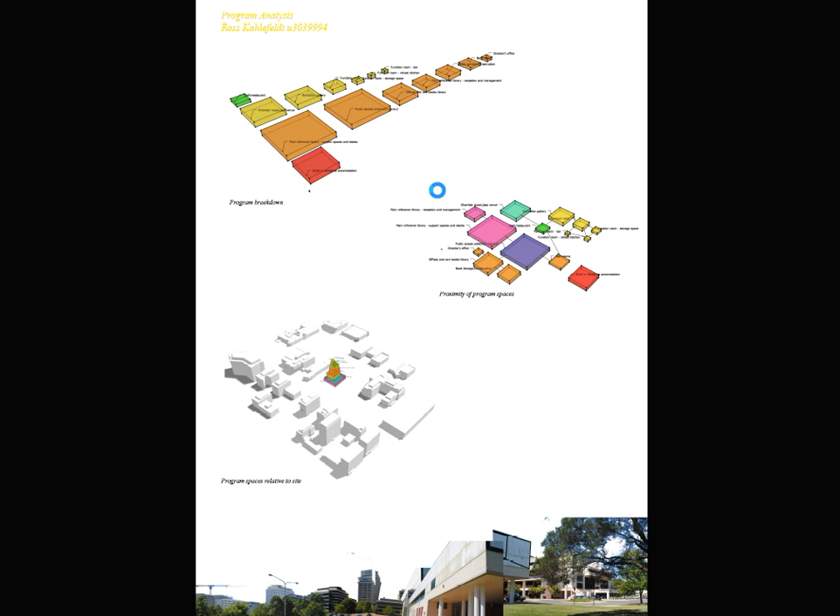It's not wanting to. Yes, that's not helpful, is it? Close. Oopsies. Okay, here we go. So Control L. Okay, so with a return brief, sorry everyone, it's spazzing out. Okay, here we go. Maybe it's a big file.

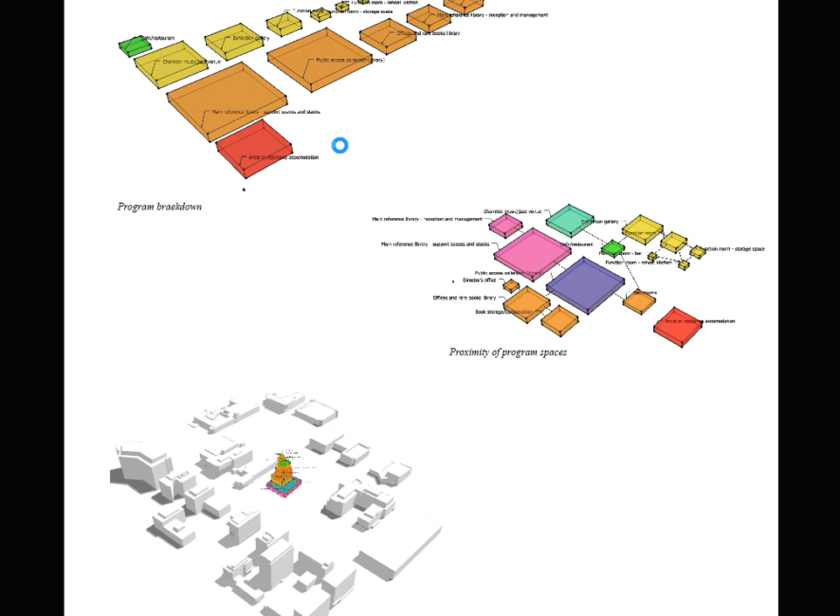Okay, so what you can see here is last year's Design Studio, where we were doing a library and theater complex in 3.1. So what this student has done is take all the main areas and turned them into boxes. Essentially, they've taken the area of each space and turned it into a square by doing the square root of the area, which gives them two equal sides. Then you can see they've used three different colors for the three different programs in the library, and they've also given them heights.

Okay, so there's many ways to do this - this is only one way. You could choose to make a model, or do it something like this, in perspective, though it's fine for it to just be axonometric and so on. Now this diagram up here actually gives you an idea of how big everything is.

And then the next thing they've done here is a proximity diagram. So what they've done is link all the spaces that need to be near each other with a line, so they can see how everything relates to each other.

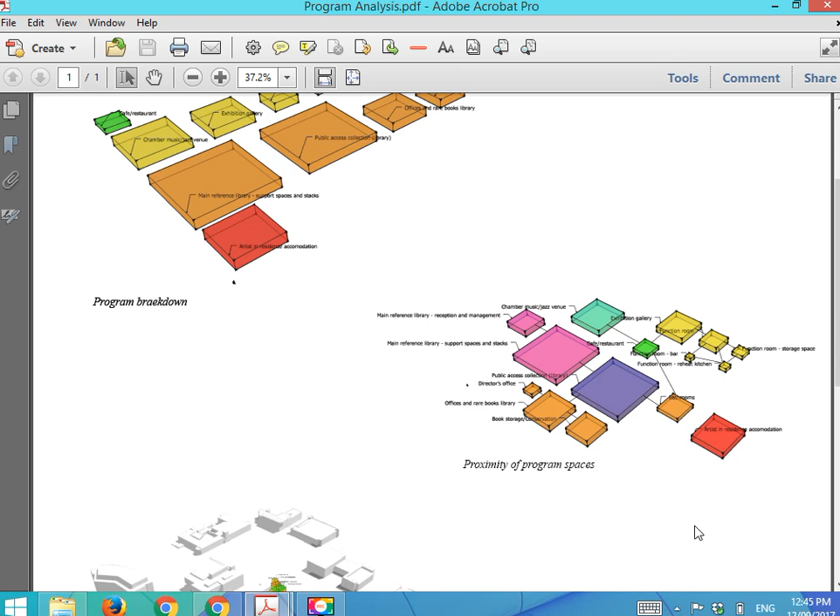Okay, so to go through it again - this diagram here, Kerry? What they've done is take each of the spaces and areas and turned each area into a square. So let's say the lounge area is 25 square meters. How you turn that into a square is you do the square root of 25 meters, which gives you 5. So it's a square that is 5 on one side and 5 on the other side - if you multiply them together, 5 by 5 gives you the area you started off with.

All right, so it's something that is drawn to scale as a 2D and a 3D thing, so you know how big it is in terms of its footprint and also how tall it needs to be. So you know that the ambulance bays need to be taller than the inside spaces. This is why this kind of program breakdown is important. Okay, so are we clear on what's required for the return brief?

Yes, so the spaces - do we create our own layout of how? Okay, so the question is, do you create a layout? I would say no for now. I would actually group them into bigger spaces, and then deal with the actual specifics of those spaces later.

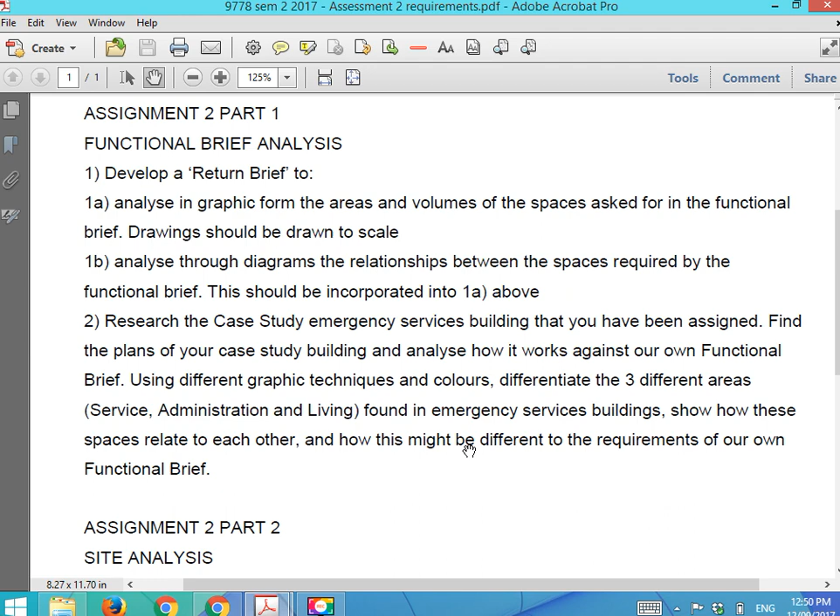And what we're doing here is a functional brief for the project that we are going to be doing. So if we go back to this, that's the return brief, which is 1A and 1B. The case study for the emergency services building I've already spoken about. And the other thing I'd like to talk about today is the site analysis.

Okay, so what you will see on Moodle is - let me get to my Moodle. Where is my Moodle? Okay, so under site information, which is in week 5, you see there that I have put in these six documents.

So what I want to do is go through them to show you what we're doing in this class. Our site is going to be on the Federal Highway at the corner of Old Well Station Road. Okay, so let me show you what I've given you here.

This is a drawing that I've done to show you where the site is. We've got the Federal Highway here, we've got Old Well Station Road here. This is the new Canberra Park Resort, and this is where Epic is. I'll show you the aerial photographs and how to get there shortly.

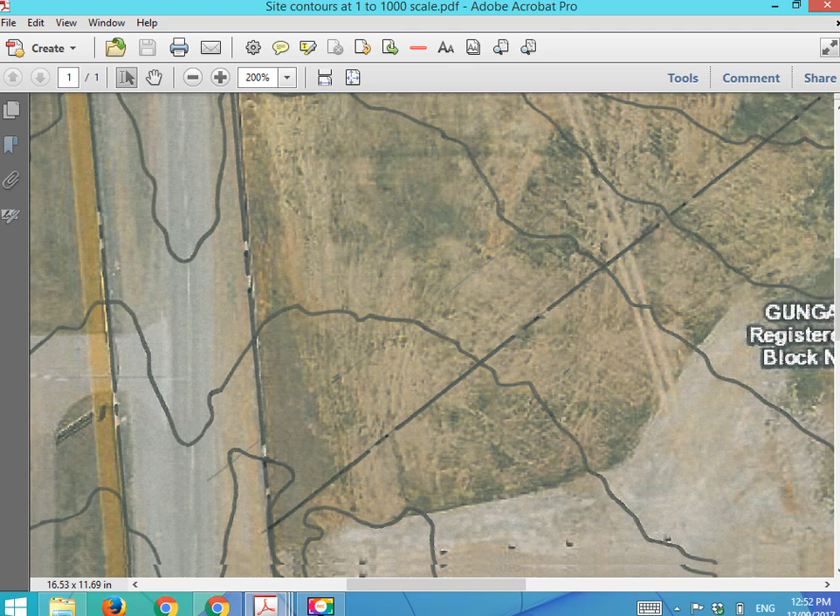So you can see on here, this is the corner here. I've actually gone and hand drawn all of these contours in there, and so you guys might well have to change this into a digital format to be able to use it, or trace it over by hand, depending on how you actually want to use it.

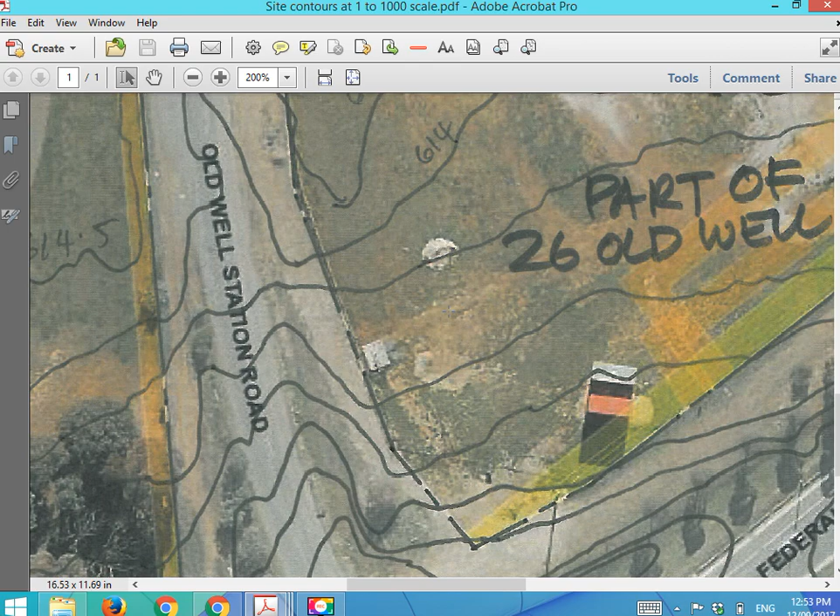But it actually gives you an idea as to the heights between the road, the Federal Highway, which is down here - you can't see that, can you - the Federal Highway and the site. So basically, from the Federal Highway up to the site, you've got about 1.5 meters. This will be interesting for us in terms of how we then get our ambulances in and out of the Federal Highway.

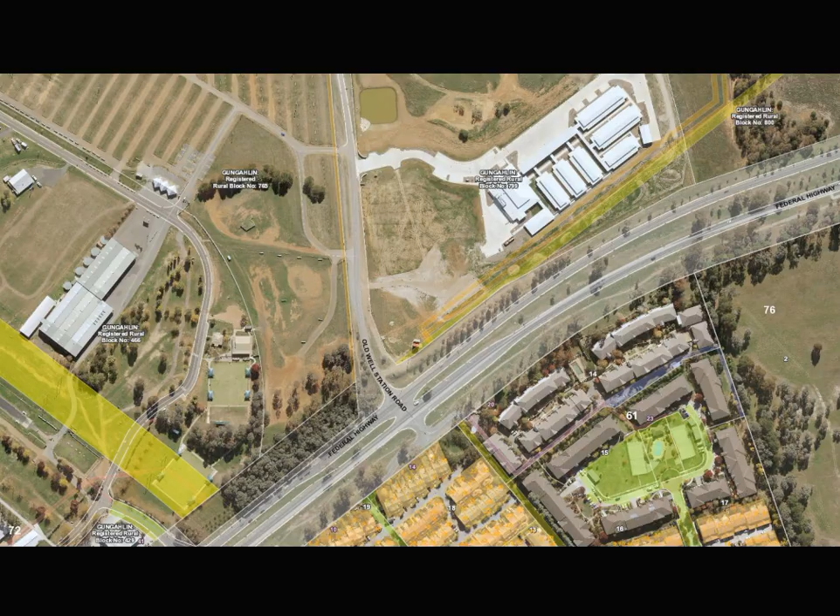Going back to here as well, what I've also got is a series of aerial photographs at different scales, and you can see the scale in the title of the aerial photograph. So this is the thing that I drew the contours on at 1 to 1000. The next one is 1 to 2000, so you can start to see this whole hotel thing, Epic here, and the houses up in Hackett or Downer or whatever it is. And then further out, we've got 1 to 5,000, so you get a better idea.

You can see the Epic markets here, and the two horse tracks over here, and the suburbs of Canberra down here. This is the Federal Highway that goes up to Sydney, and this is the road that goes up to Gungahlin through Mitchell. Then finally an even bigger one at 1 to 10,000 scale, which shows the youth detention centre, the Mitchell industrial area, the racetrack, and Hackett Downer and so on and so forth.

I'd draw your attention to the address of the site, which is actually part of 26 Old Well Station Road. Now, all of these aerial photographs I've got from the ACT mapping service.

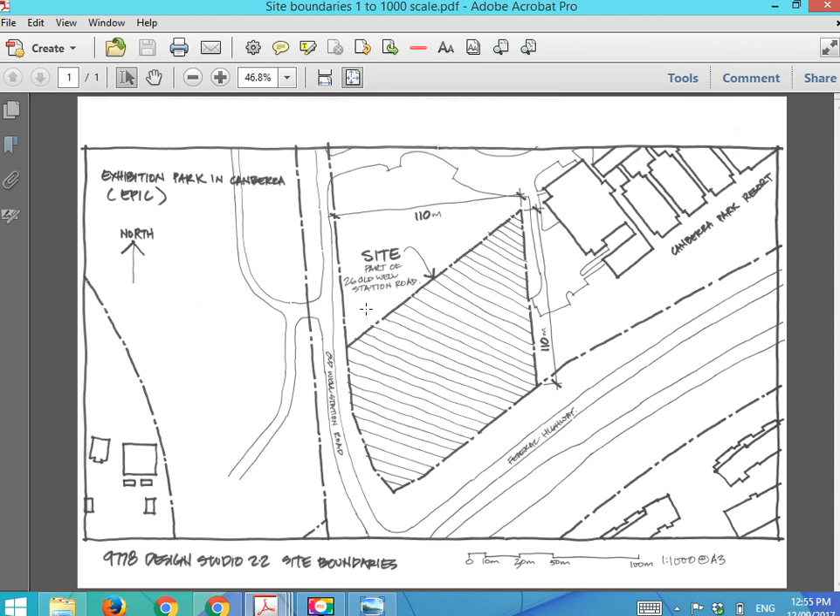I'll now show you how to get there. What you do is go to actmapi.act.gov.au. Just for your information, if your case studies are in Canberra, this is the most up-to-date aerial photographs you will get on Canberra, much more up-to-date than Google Maps or Google Earth. So if you have a case study in Canberra, this is the one to go to.

What you need to do is click on the top left, the basic aerial mapping service, and once it loads up it will give you a choice as to what you need. I'm sorry everyone, it's going to take a little while to load up.

Any questions so far? With this, all the different layers that you need to do your site analysis for are going to be there. Okay, let me just pull that out.

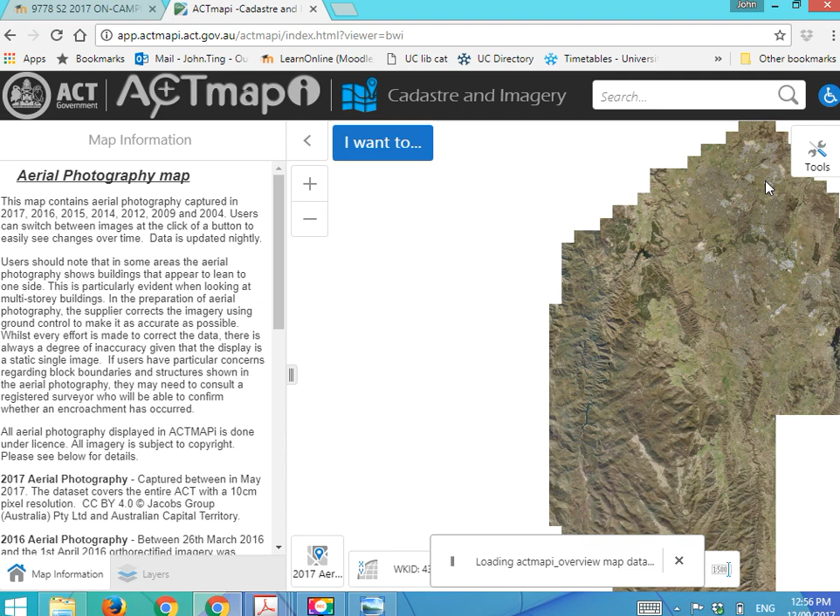So what I basically asked for is the topographical features of the site and the surrounds. Topographical means the shape of the land, and things like lakes and rivers and what have you. And of course you now have the contour map to work out the fall of the site and surrounds, which you'll be able to get from these maps.

The existing vehicular and pedestrian circulation, which you can see on the aerials, like here. And then the climatic conditions of the site and surrounds. North is presumed to be up with all these maps, so you can tell me where the sun comes from. You can research where the rain comes from in Canberra, where the wind comes from in summer, where the wind comes from in winter, and so on. All of those things need to be dealt with as well.

Number 5 is I want the existing buildings on the site and surrounds, their heights, forms, uses and so forth, and you get a plan here as to what everything is. But don't forget you'll also have to go out onto the site and take photographs of all of these things, which I'll show you how that works in just a minute.

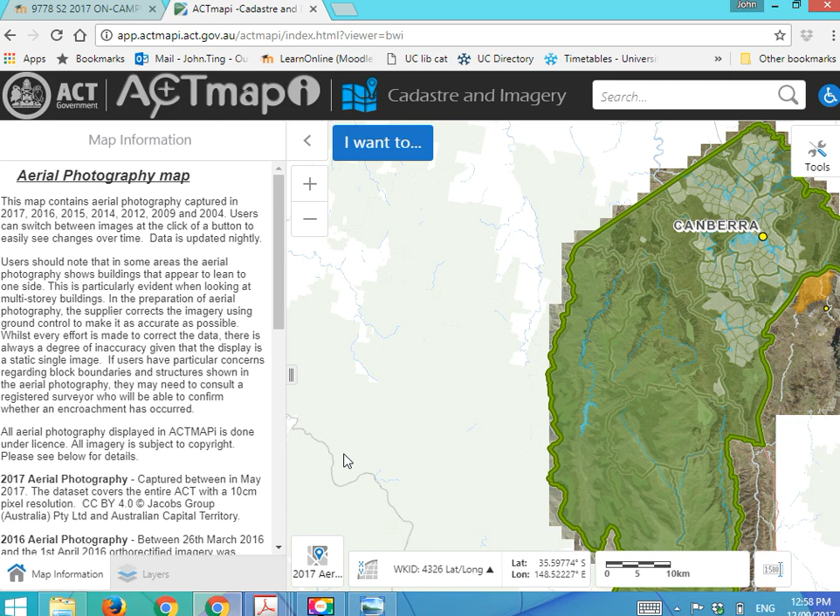So what you do here is go, I want to search blocks. And then search block by street address, and the street address is 26 Old Well Station Road.

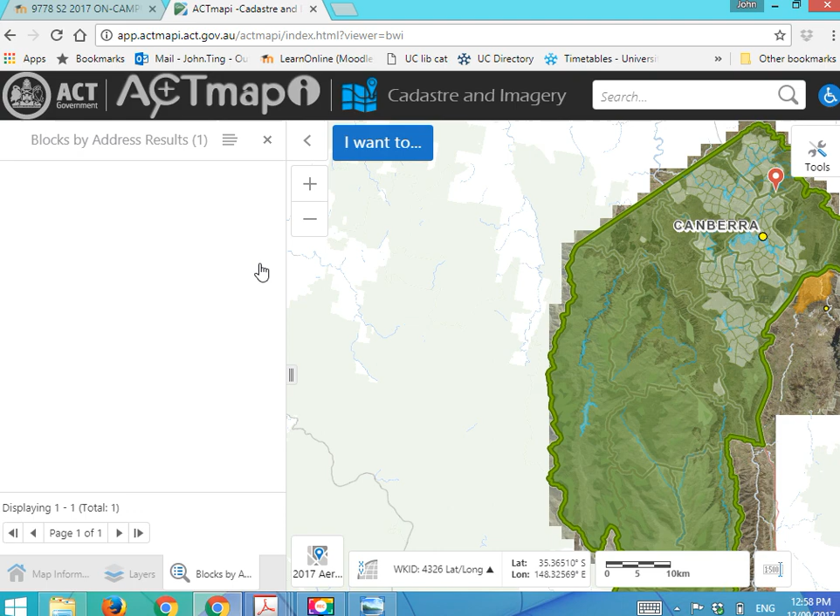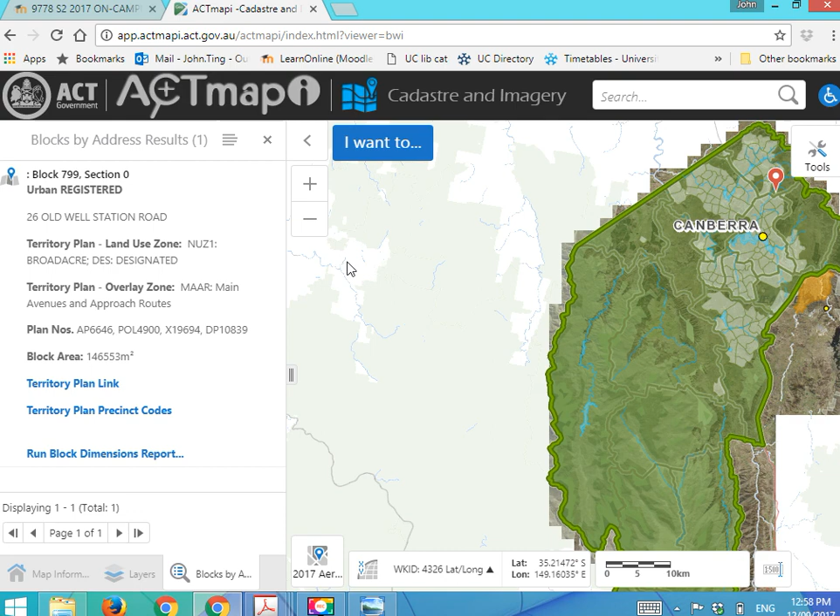Of course you don't need to put in what suburb it's in, because it seems that in Canberra none of the roads share names. Every road has its own name, so there are no two roads with the same name. So now you can see where it is. I think if you click into it, it will zoom into that. Okay, so that's actually what we've got there. So that actually gives us our site there.

So you can see from here there's a whole stack of things. You can see our site is actually this yellow bit, and what I'm doing is cutting off a corner there for use for this design studio.

Then you have all sorts of details about the land and so on, which go up and down there. This is really more about a town planning designation. Don't worry about the zoning—I'm giving you all permission to put an ambulance station there.

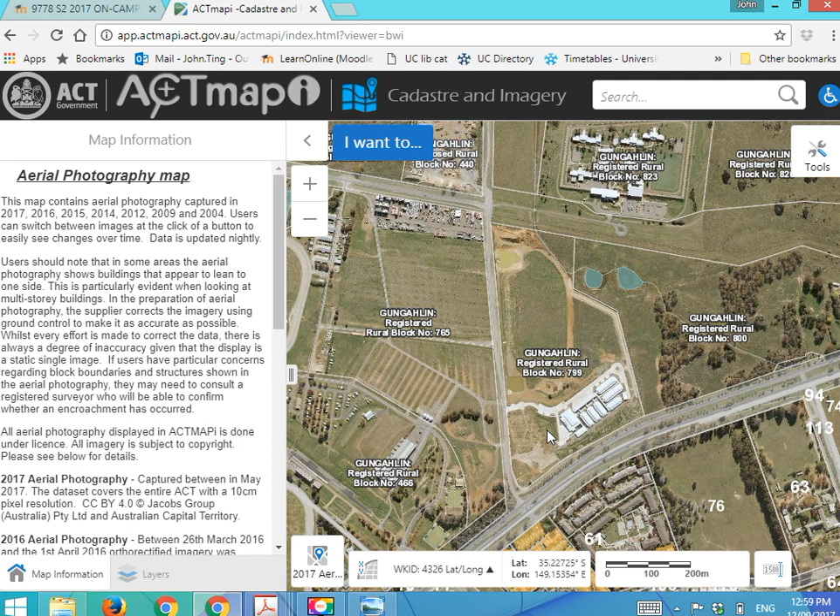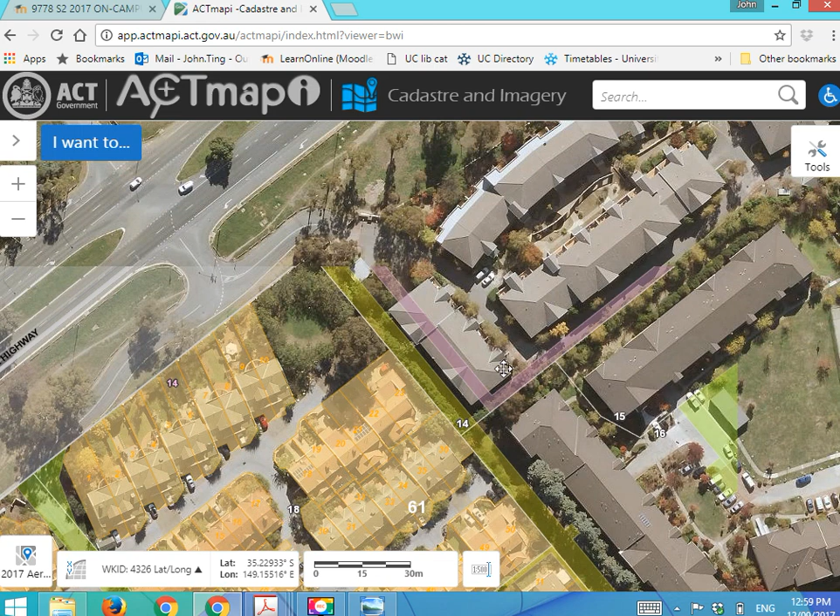So if we go down here, you can actually see that we can zoom right into it, and you can see basically what all the buildings are and all the property boundaries and what have you, which is very handy to tell you what you need to look at.

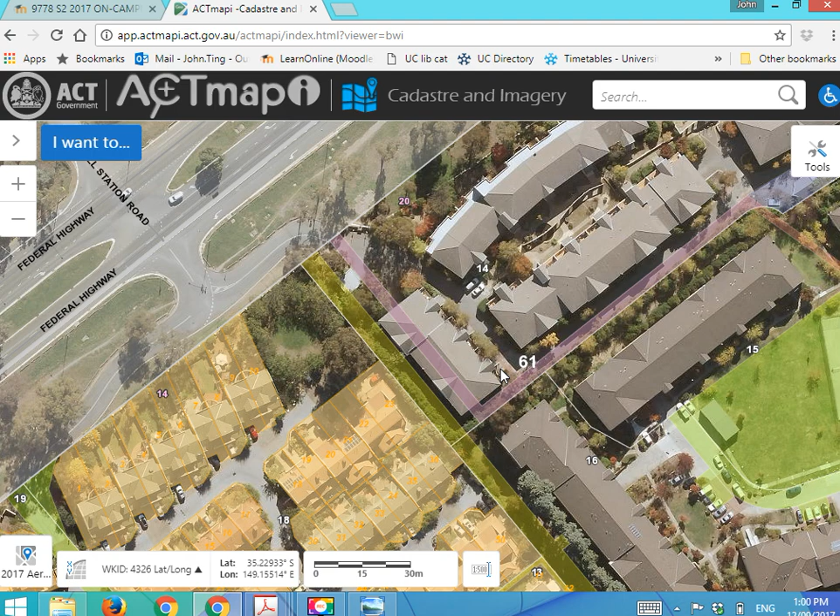But for the heights of the buildings and what have you, you need to go out there and have a look at it. In the site analysis I've asked for existing buildings on the site and surrounds, heights and forms, etc. Now of course the next question is, how much do you do?

Do you do something like this much?

Or do you do something like this much? Okay, so there's no end to this.

So what I suggest is you do an area that covers the site and maybe a little bit more, so perhaps something to this area. So the site there we have in yellow, and the red might be the parts that cover all the bits and pieces that we need.

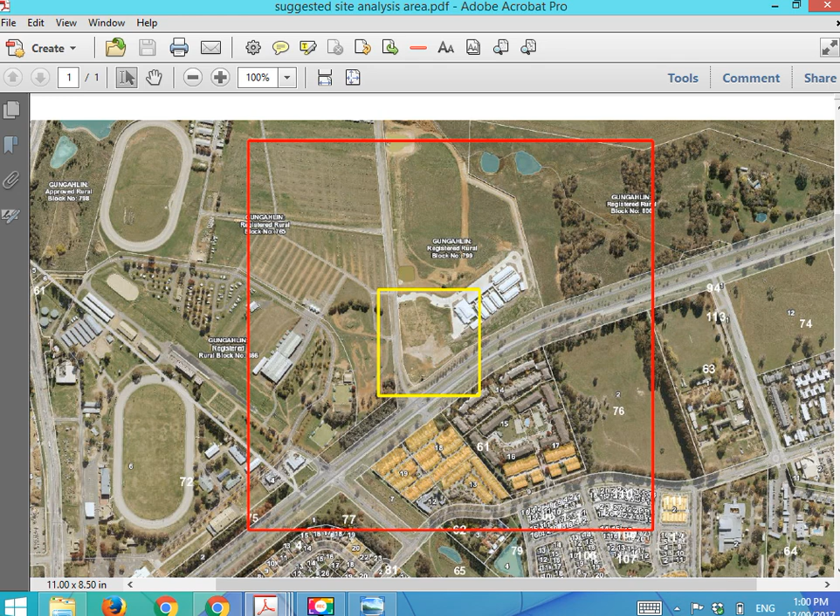All right, so what I'll now show you is some examples from last year in 3.1. Any questions so far? No questions? All right, so

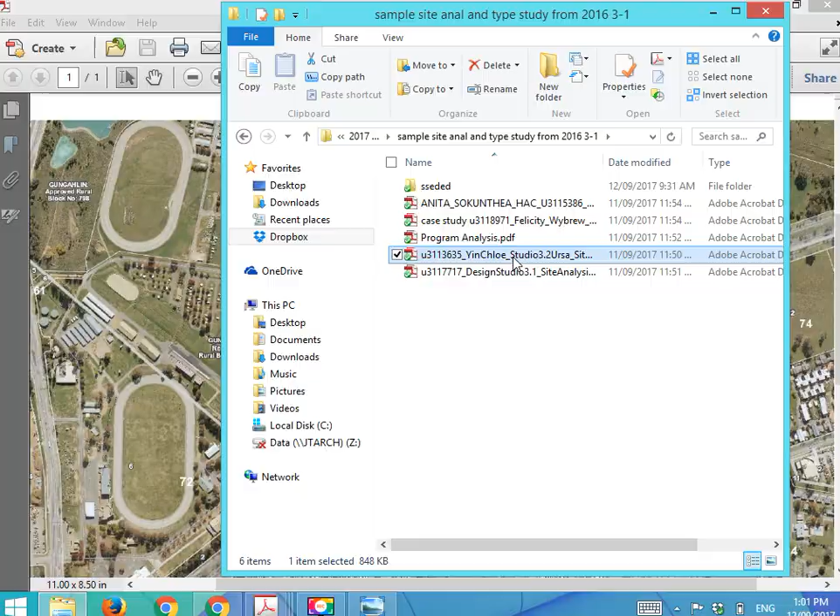Now, first thing you have to remember is 3.1 was a site in the city. So the site was much denser, it had a lot more buildings around it, and so on and so forth. And so it was a different kettle of fish. These drawings were all at A1.

So the drawings were scaled to suit A1. All right, but the kind of information you need to have on it is pretty much what you see here. Let me try the Control L again. Okay, so this is Chloe's A1 panel here.

So what she's done is each of these drawings actually analyze a different set of things, and they also come in different scales. So you'll need to decide what scale you want to do each of these 6 categories in, and maybe you might want to have an overall one as well.

And what you can also see with Chloe's thing is she's got lots of site photographs, so you can get an idea as to what she's looking at. So if I zoom in,

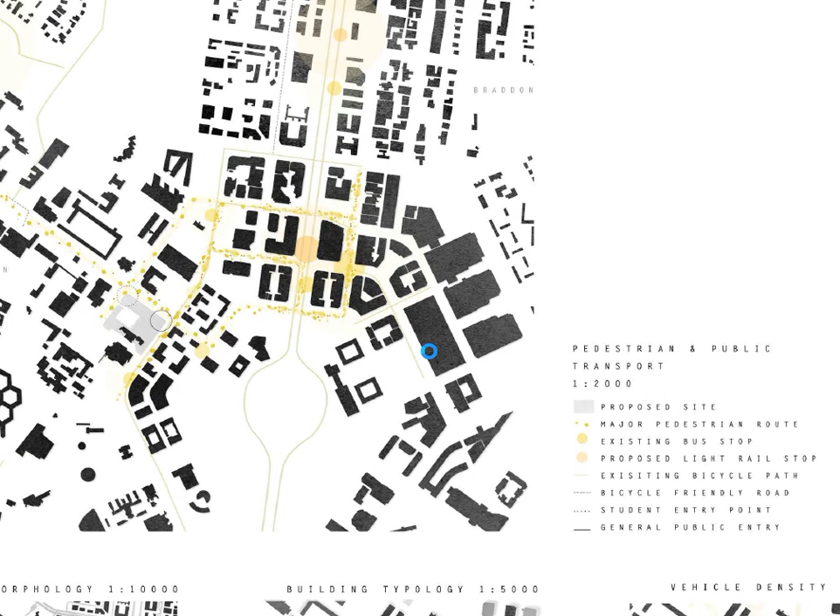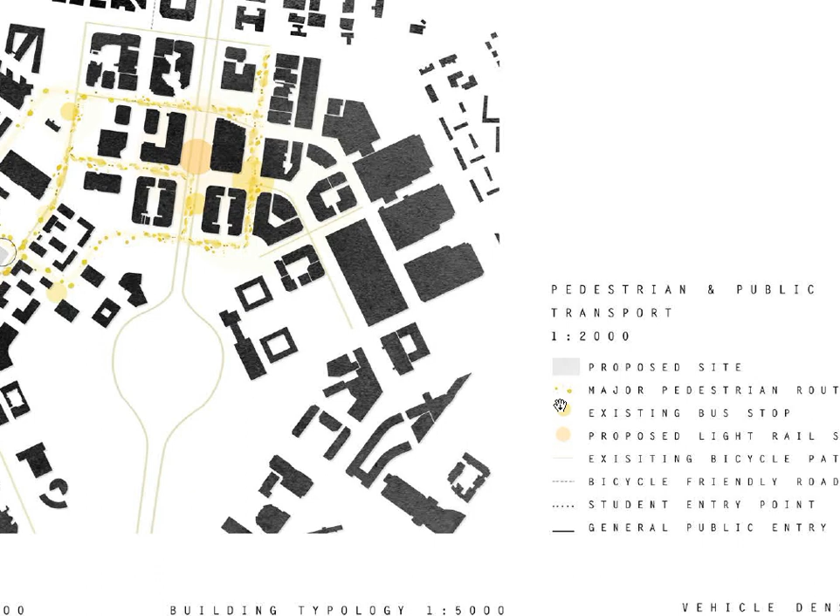the first thing that she's got here is basically her pedestrian and public transport map, right, at 1 to 2000, which has all these different keys here. So basically, where the bus stops are, where the proposed light rail is, these kind of things are the major pedestrian routes - these kind of bubbly things.

So basically, this was where the site was. You can tell because it's grey, a different color. But this is how people walk through the city to actually get to the site.

Okay, the other thing that she's got here is the vehicle density map. So not only is it about roads and where the cars go, but also which roads carry more cars than others. And she's

represented that through the darkness of the color. Okay, so right here the dark yellow is where there's more cars, and when it's more faded, that's when there's less cars. So this again is the site that we were dealing with last semester.

So stuff like that you can put in the existing vehicular and pedestrian circulation of the site and surrounds. So really this is similar to exercise 1C, where you're abstracting these kinds of things on the map to show us what we need to know.

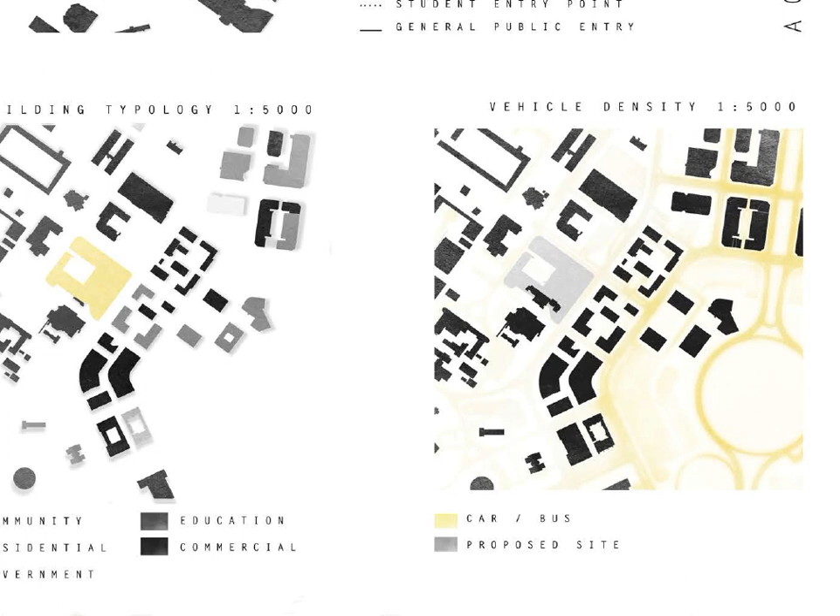What she's got here also is building typology study. So not only has she gone through and told us where the buildings are, but she's also gone through and told us what kinds of buildings they are: community, residential, government, education, so on and so forth.

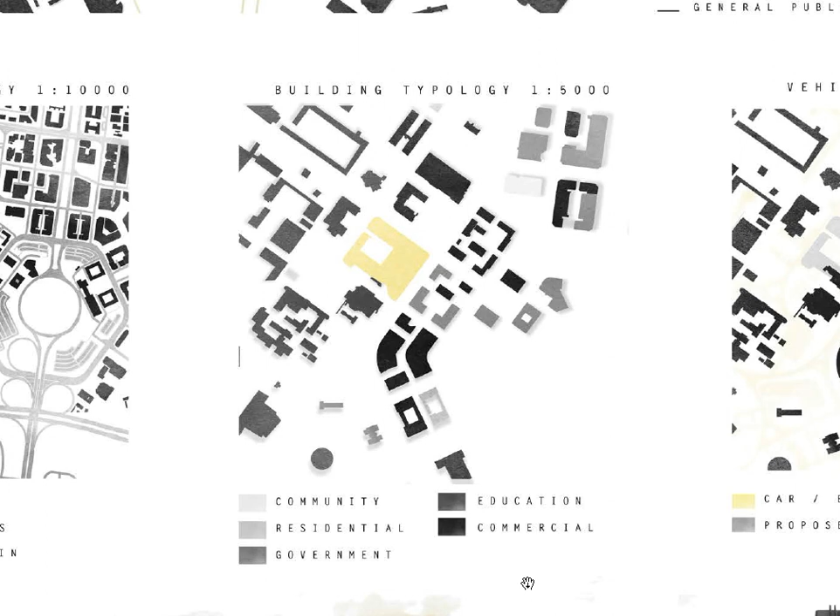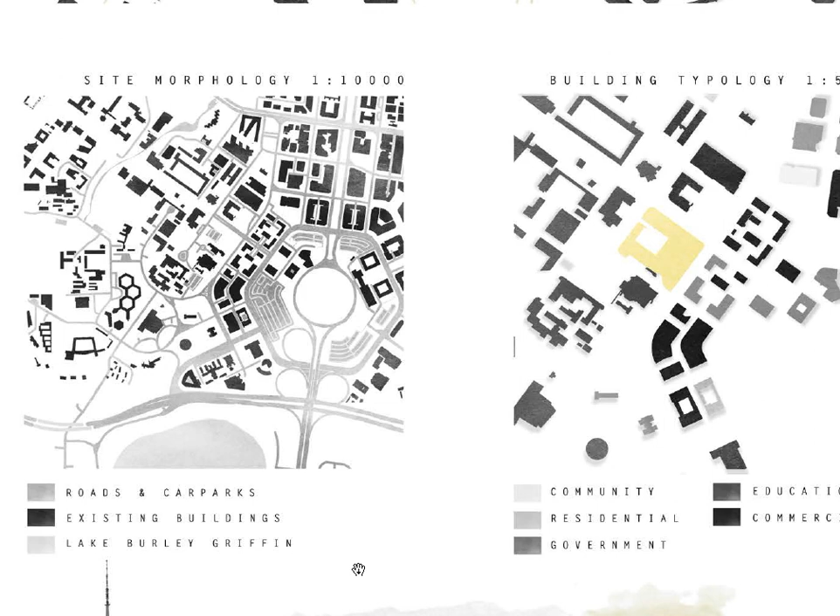Now yours is going to be simpler, right? Yours is not going to be as complex as this. Yours will be simpler. And then what she's also got is car parks and existing buildings - it's a more general thing.

Okay, so the photographs are really important because it points out the things that were important to her on the site. Now, for this site analysis exercise, we won't be going out to the site altogether.

I will leave you guys all to make your own way to the site and take pictures and make notes and just get a feel as to what you're looking at.

Now, because it's next to the federal highway, what I would suggest is firstly that you go to the site. There's car parking in that hotel, and it's just a grassy field next door that you can walk into. But I would also drive to the other side of the road

just so you can get a feel as to how the landscape is, how high it is off the road, is the federal highway going up or down past that, how does it look from the suburbs across, and what might be useful for you guys is to get 2 people in the car, and for the non-driver to be taking pictures of what the site looks like as you're driving past going towards Sydney, and also as you're driving past coming down from Sydney.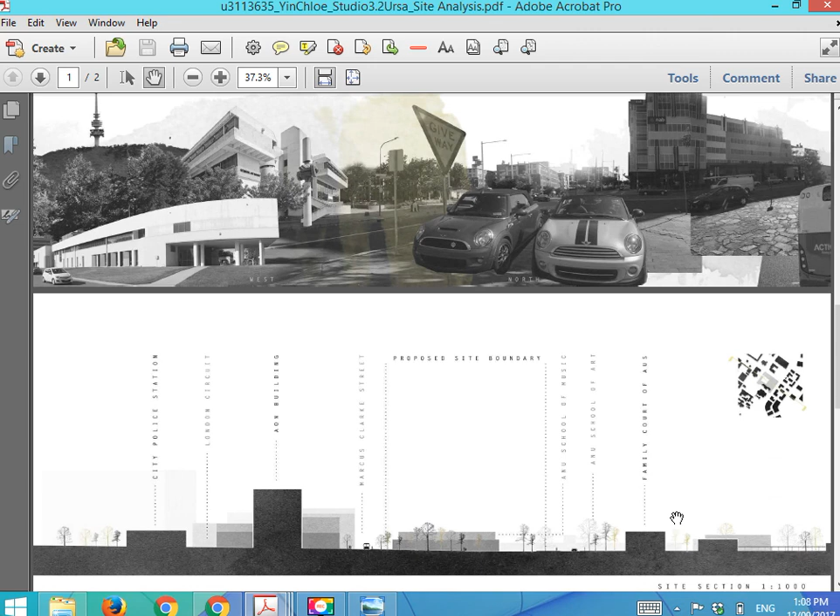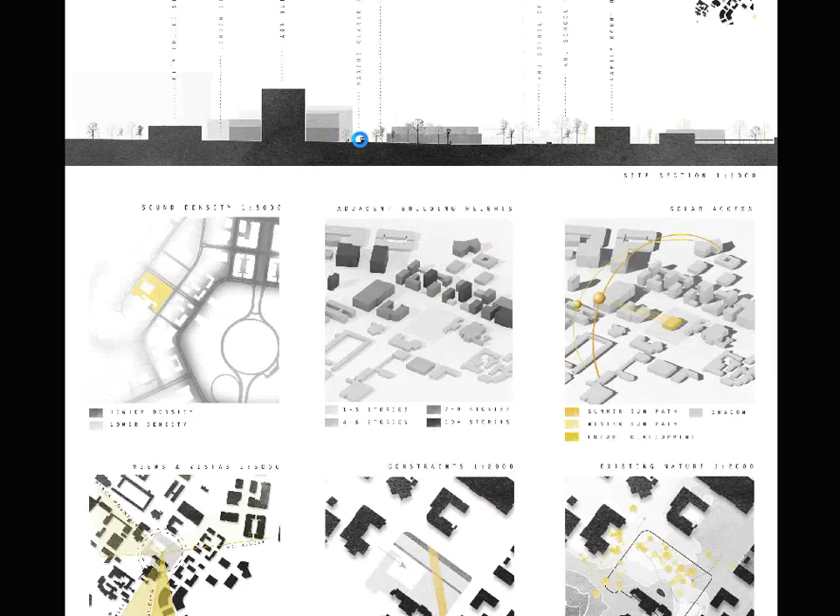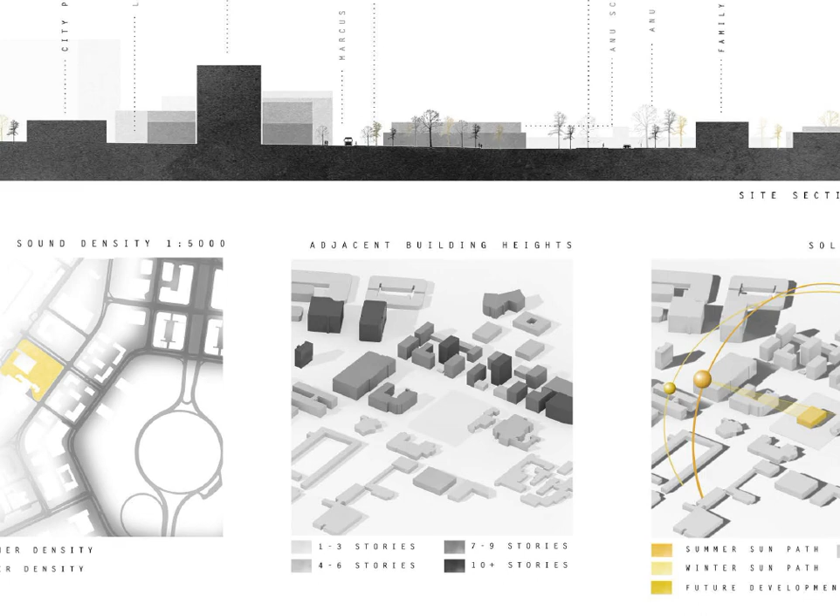Now, you see what Chloe has done here is she's also got sections through the site, so we get an idea of how the site actually goes, whether it's sloping up and down. In her case, last semester, it was quite a gentle slope. In our case, our site is fairly flat, but there's quite a difference in height between the corner of our site and Old Wells Station Road.

Now you see what she's also done here is a sound density, which I've not asked for, so let's not worry about that. But this is a nice little model she's done, where she's got the site coded in terms of volume as well as color, to show the different heights of the buildings.

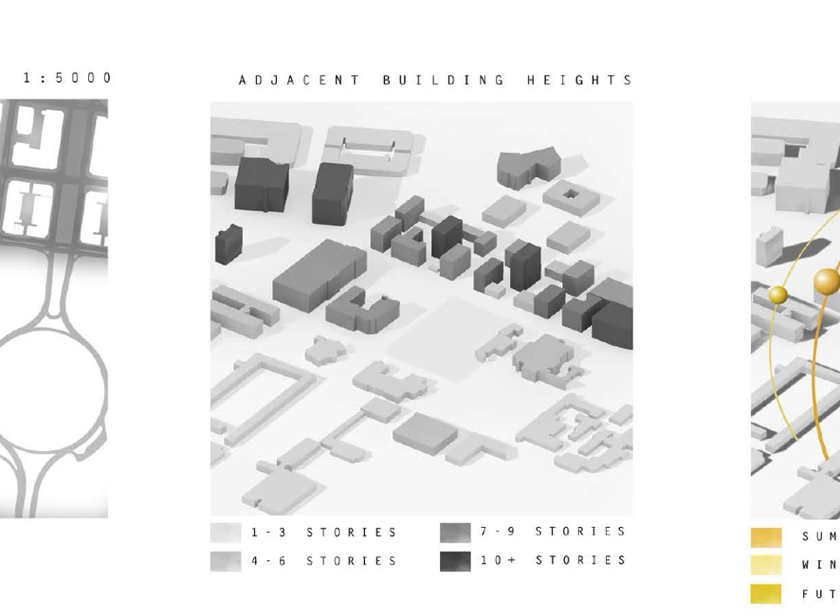This refers back to point 5 on the assignment sheet, where I've asked for existing buildings on the site and surrounds, their heights, use, forms, etc. Our site will be much simpler than this, because it's 2.2, not 3.2, but this is the kind of thing you can expect moving on to 3.1. So getting some practice developing these kinds of drawings is most important.

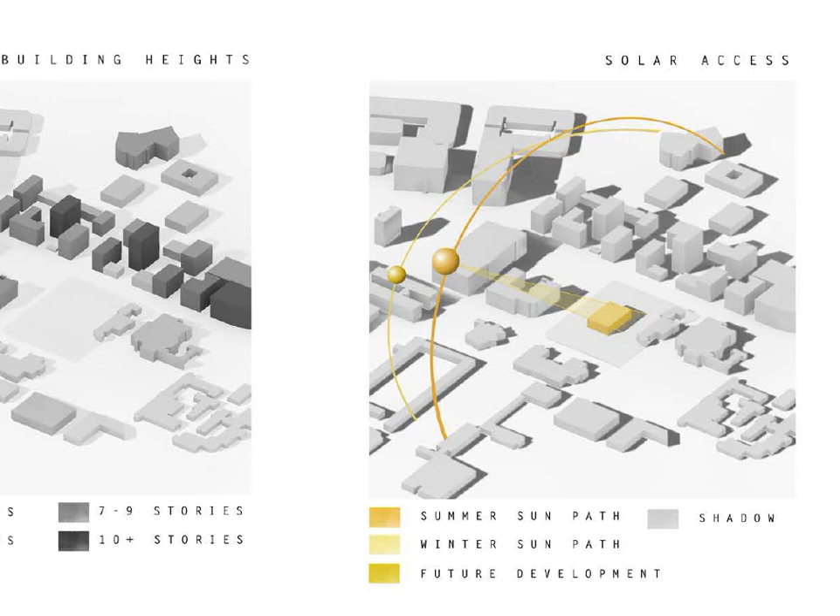There's many ways of doing solar access, but basically what we need is the site and the sun path in summer, the sun path in winter, and also what is in shadow. This gives us an idea of where we should put things that need sun and where we can put things that don't. Certain parts of the building, like the living areas, will probably need sun, so we need to know how these things are done on the site.

Existing nature, you can see very clearly this is the site we're dealing with, and here are all the trees that are on there. The existing vegetation, which is what I asked for in point number 2, the flora of the site and the surrounds.

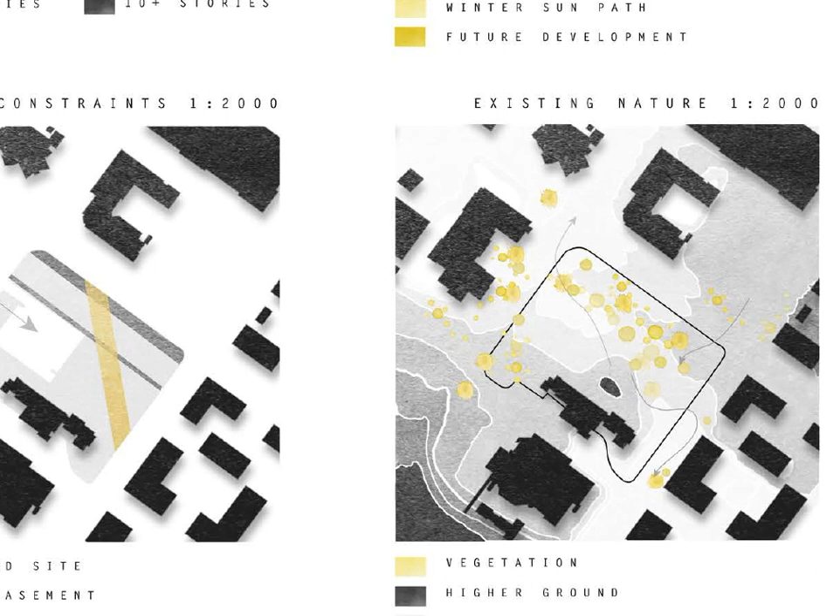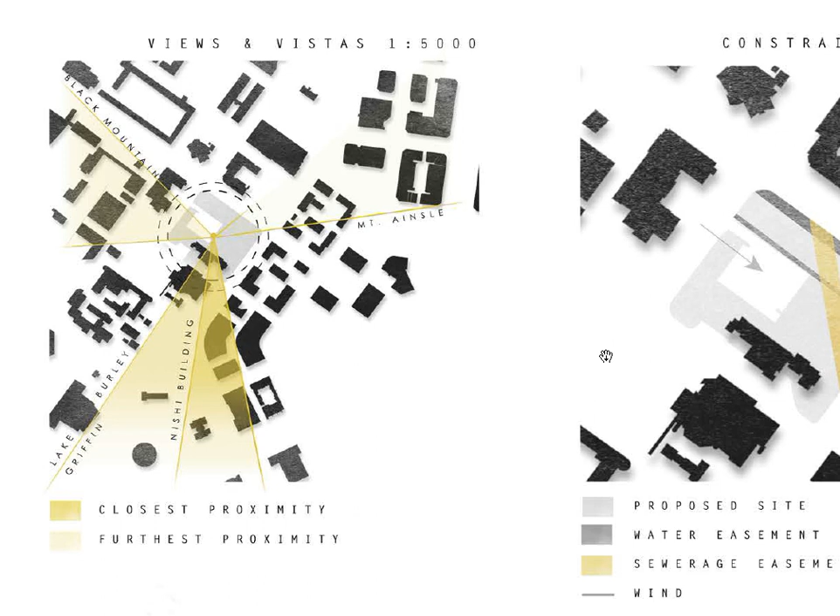These are the constraints, which I haven't given you any constraints, so we don't need to do one of those. What she's got here is views and vistas, what you can see from the site. Because we're up on a point, this would be important for us in terms of what we can see from our building over the landscape, and how our building can be seen from different places in the landscape.

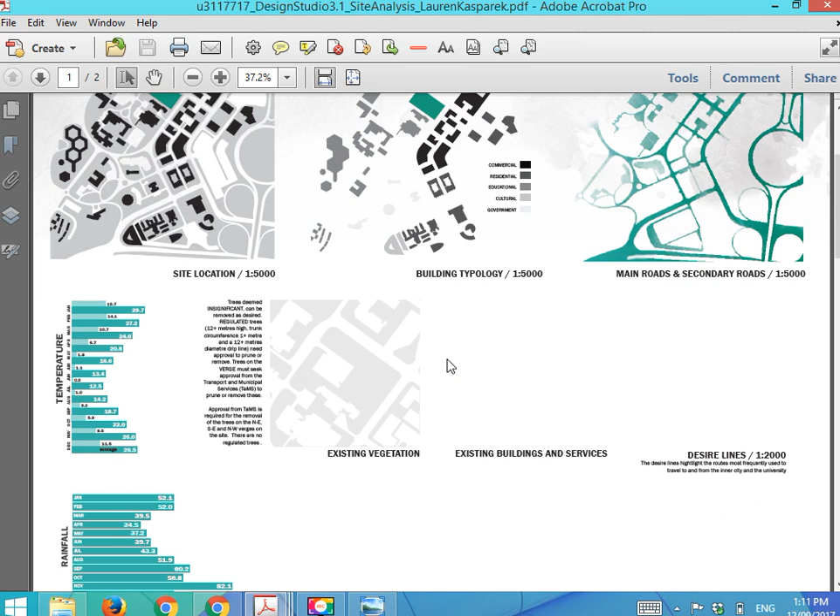So what I might do is show you another one from last year. This one is Lauren's one, and you see it's actually quite different in the way she's done it.

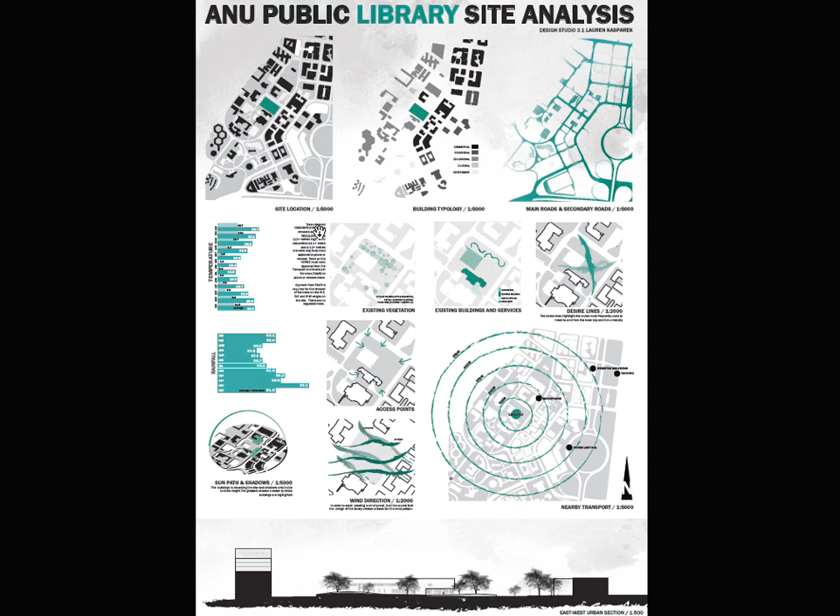Sorry, it must be a monstrous file. You can see her colors are different, and she hasn't got so much feathering on the edges of her drawings, so they're much more hard lined, if you like.

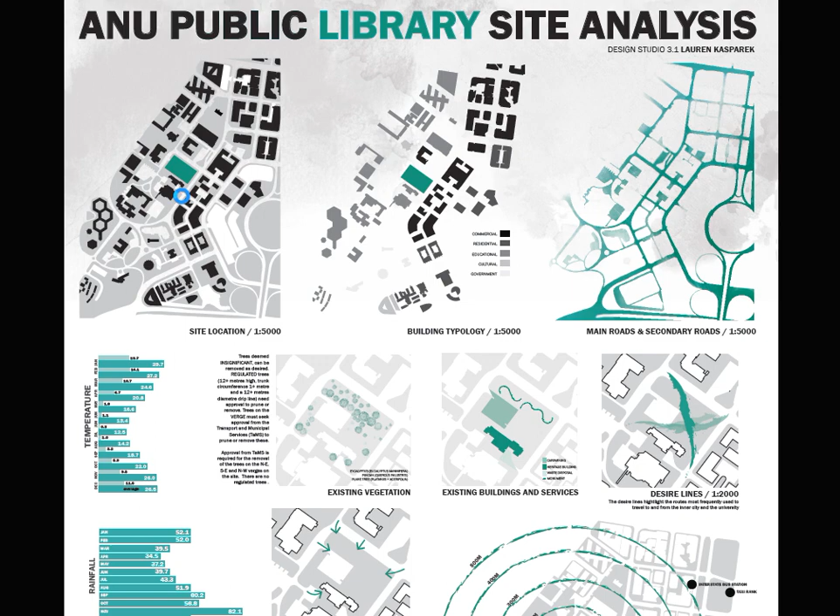So you can see the way she's got a site location with everything on it, and a different way of doing the building typologies, secondary roads, existing vegetation, existing buildings and services. There are many different ways of doing this kind of site analysis drawing.

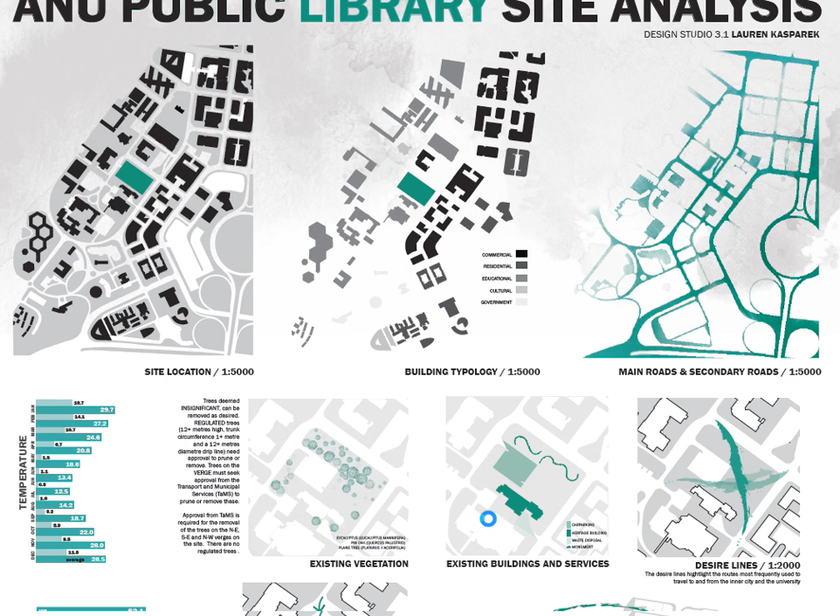This thing isn't working, so let me go back here instead. The reason these things are difficult to deal with is because all the images are monstrously huge. So when doing this kind of thing, make sure your images are at 100% size when you put them into drawings, and the resolution is no more than 300 dpi. That will let you get decent size files so this doesn't happen.

Remember that we look at the hard copies as well as the things on screen, and the easier it is for us to look at these kinds of things, the better it is in terms of grading them.

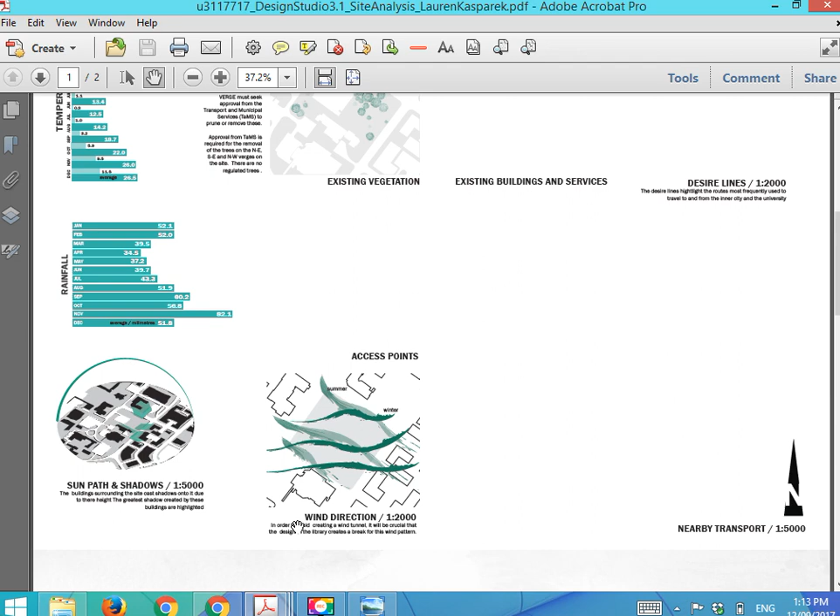Now let's see. So you can see here how she's done the wind direction, with wind directions in winter shown in dark green. Let me try and zoom in. Okay, so the wind direction there, you've got summer in light green and winter in dark green.

What's not so good about this diagram is I don't know where it's coming from, and I don't know where it's going to. So when something has direction, remember to give us directional indications.

Okay, any questions?

Okay, so finally, and I'm going round in circles slightly, what's this one? Let me see if this one actually tells us something more.

Okay, so finally, I'd like to return to the case study for a minute, since I forgot to do this earlier. This was a case study exercise for Studio 3.1 from last year, where they were doing a big library and theatre complex. Yours will obviously be much smaller, but you can see they put in pictures of the case study so we can see what it looks like.

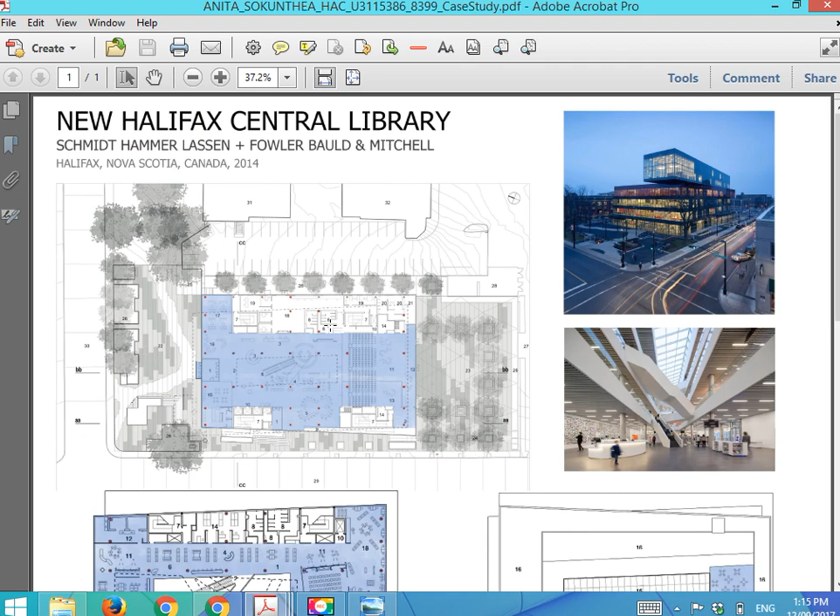But in the plan, you can see it's divided into blue bits and white bits. In the same way, we might think about it like this. These are the kinds of colors they're using, but in terms of a library, over a plan, so you can see very clearly the two different kinds of spaces they're exploring over a number of levels.

All right, so every level needs to have its own kind of plan. They've also done it in section to explain how this happens in section.

Now, just to go back to what I said before, we certainly do not need to have these base drawings. It makes things easier if we have them, but we can also come up with our own diagrams just from looking at roof plans and elevations and things, cobbling our own things together from scale drawings that we have.

These things do not need to be of an accurate scale, but it's good to have an idea as to roughly how big these things are. And of course, on Google Earth, you have the ruler function, so you can measure how big a building is going to be if you don't have plans.

Okay, and also please use your detective skills, much like those CSI type TV series, whereby you need to use your powers of observation to figure out how big everything is. So when you're looking at a fire station with 10 fire trucks in there, you've got an idea as to how big a bay needs to be, and you can work out backwards how big the actual building is.

Are there any questions on the case study?